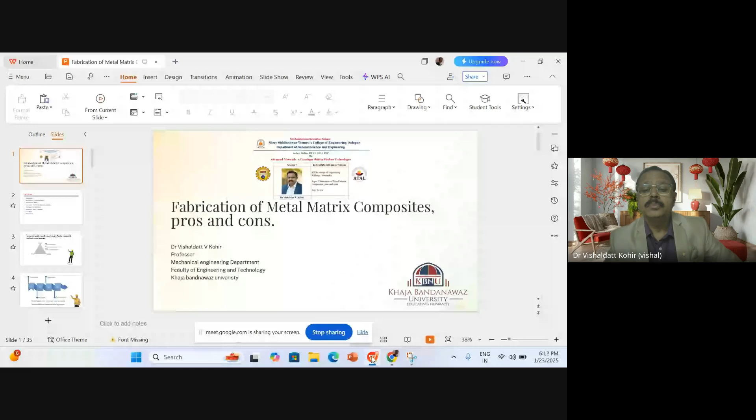So today's agenda: as usual, introduction to metal matrix composites, then the fabrication part, then comparison of various fabrication methods, challenges and limitations, then solutions to major challenges, then some case studies, and finally the pros and cons of fabrication of metal matrix composites.

As an engineer, we always look for three things. In my opinion, as a mechanical engineer, we look for speed, cost, and quality. Every engineer strives to do the same thing: he wants to produce the product as quickly as possible, as cheap as possible, and as good as possible.

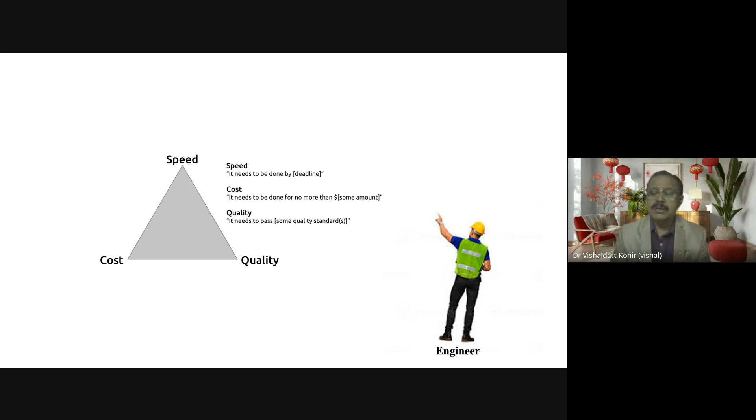In the changed scenario of the 21st century, an engineer's aim is to develop things for sustainability. Sustainable engineering is a way of designing and creating things that meet our needs without harming the environment or depleting natural resources. I hope everybody agrees with me on this.

Now the buzzword is sustainability. Whether it is the energy area, manufacturing area, or natural resources, everybody talks about sustainability. In this perspective, the pros and cons of fabrication of metal matrices become a little more special. So I congratulate the organizers for selecting this particular topic for the FDP.

As an engineer, always we look for these three things. Any engineer, especially a mechanical engineer, always strives to make a better product. And when we talk about a product, always we talk about its performance. What do you mean by performance? It should give sufficient service at a service station or place without failure.

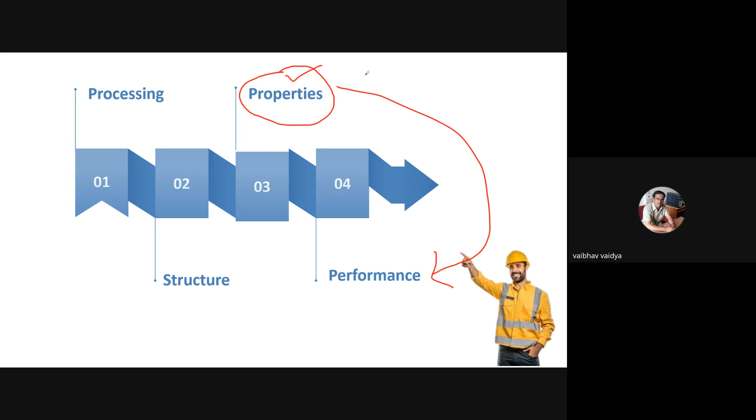Strength, tensile strength, compressive strength - these all put together I can call mechanical properties. Any other property? Thermal properties - fantastic, we can accept that. Any other? There could be physical, mechanical, chemical. Yes, you're absolutely right - physical property, chemical property, magnetic property, optical property. Okay, so there's a series of properties.

As a mechanical engineer, always we are interested in mechanical properties, but this property is dependent on its structure. The structure may be macro structure, microstructure, crystal structure, or electronic structure. But as a mechanical engineer, we are always interested in microstructure or crystal structure. So any change in the structure will lead to changes in the property.

A small example I can take, and I want one small answer from the participants. Graphite and diamond are made up of the same material. Can anyone name the material? Is it carbon, sir? Yeah, it's absolutely right, it is made up of carbon.

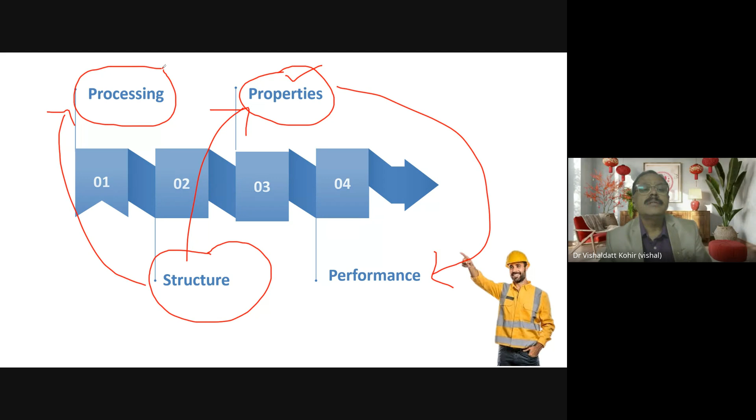So the structure-property relationship is very, very important for us. Performance depends on the properties, and property depends on the structure. And what kind of structure I get depends upon the processing. How I process it will decide my structure. So most of the time we are very much interested in the structure, especially the microstructure.

Okay, can anyone give me an idea what do you mean by a microstructure? Apart from it being visible through a microscope, apart from this definition, I want some explanation for the microstructure. So what do you mean by microstructure?

So participants, that's what I say, we are all teachers. We are all teaching the subjects regularly in our academic classes. So interaction is always very important. Sometimes I may learn something from you, you may learn something from me. So let's make it a little interactive, more discussion type rather than monotonous. The basic objective of the faculty development program is that we all faculty together make some changes in the teaching and learning process. That is the main aim.

Okay, so with this note, I am again reaching out to the participants. Can anyone tell me what do you mean by a microstructure?

I'm sharing the window. But when I share the window, I think again I'm getting full screen. Okay, let it be, okay, we will go with the chat box.

The answer which has been given, different phases, something is there, no? Organizer, phases present in alloys, this is yes, one answer. And one more is what? Arrangement of grains. Okay, these are very close ones. So basically, different phases, the distribution of different phases itself, we call it as microstructure.

So why I'm asking this question is that when we go for fabrication, this microstructure is going to decide the properties. Some connection is there between obtaining the structure and the properties. So that's why I thought of this. So it's better to have an idea before we get into the fabrication of structures. So in this way, there is a connection between performance and properties, properties and structure, and structure and processing.

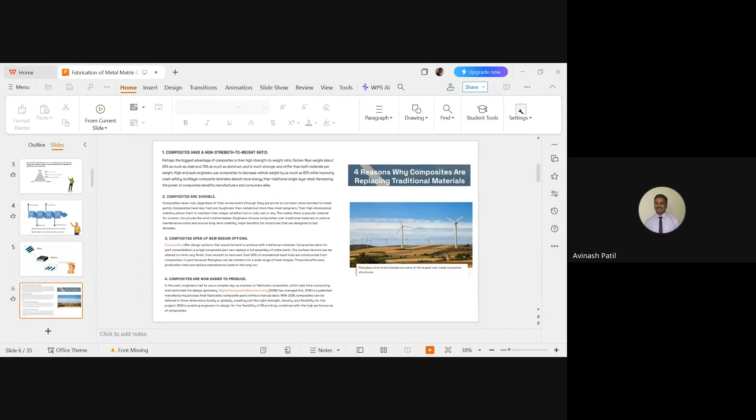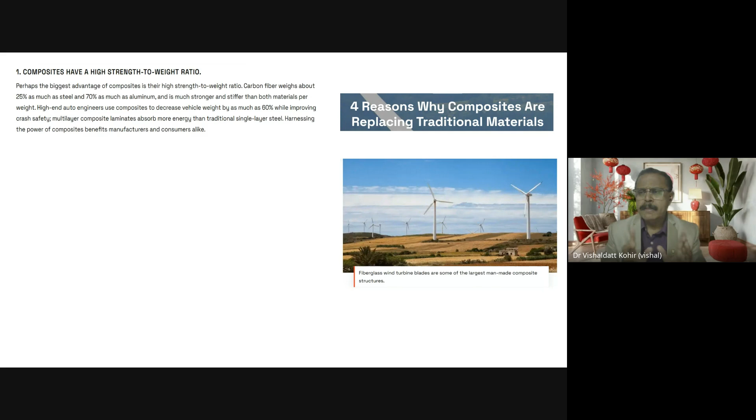Sir, may I interrupt? The slides are not changing. If you are changing slides, only the fourth slide is visible now. Is it visible or not? There are four reasons, processing, structure, properties, performance, still showing the same slide. Let me check. Now it has changed, it's the sixth one, but visible in small scale, not full PPT mode. I'll try the full sharing option. That will be better. Now it's visible, make it full screen. Now the entire screen is showing, four reasons, replacing traditional materials. I wanted to try another option but it may create noise. Let me log in again, there may be some echo. Is this okay now? Is it visible, full screen? Any echo? No, audio is clear, no echo, it is good.

So there are four reasons. Two I have discussed, and the third one I was explaining, that composites are open to new design options. So one, they have a high strength to weight ratio. Second, they are more durable. And the fourth one is composites are now easier to produce. This is one point to be noted nowadays.

Almost all areas of life, composites are being used. I would like to go back to the audience and ask for day-to-day objects or products made out of composite material, not necessarily metal matrix, let it be any composite material. Can I get examples of use of composites in day-to-day life? I'm going to the audience now.

Good evening, sir. Good evening.

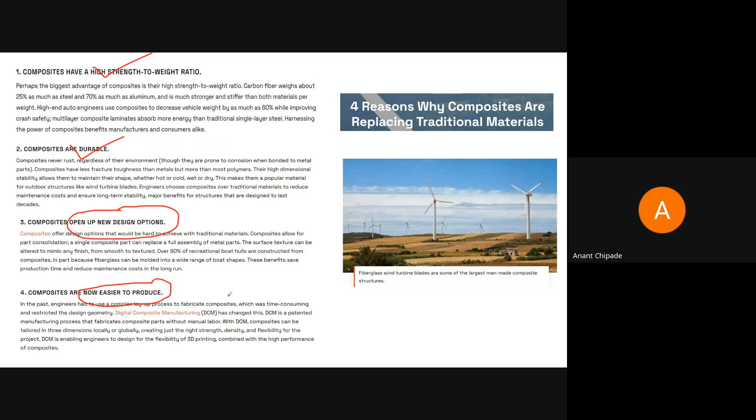Yes, sir. We use composite materials in day-to-day life, for example wristwatches, shoes, even mobiles, pens. You are right, you are absolutely right, there is no doubt about it.

Okay, Sachin, Bhosle, FRP ceiling sheet, sports equipment like badminton racket, bicycle frame. Yeah, fantastic. Any other?

So somebody says that beds. I'm not aware of the using of composites. Of course, with coir and spring, it may be a composite one.

So fantastic, thank you audience for being interactive. In my opinion, nearly 60% of the day-to-day life products we are using is all composites - it may be plastic glass, fiber glass, oven utensils which are suitable for microwave oven.

All these things - there is no area where these composites are not reached. This is my focus, I wanted to convey this message. Just look around you, everywhere you will find it - right from a hanger, pin, whatever product you take, it will be a composite material. Rarely we nowadays find any material which is made out of a conventional one.

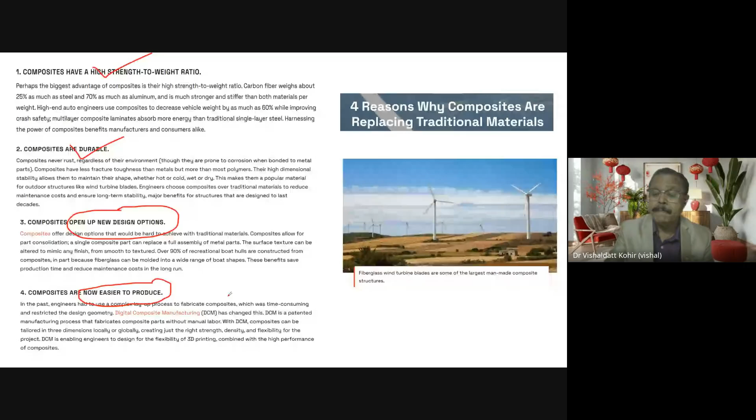This is my idea. So as we go a little further, we will focus more on metal matrix material, and most of them we will fill with 6000 series and 7000 series. This slide I will commit afterwards.

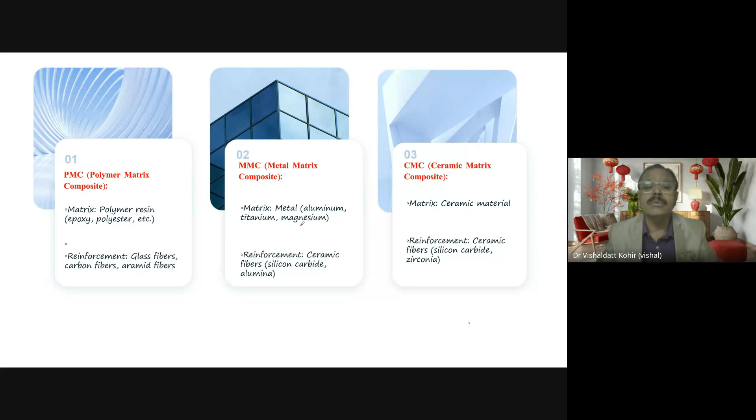My focus is on matrix. So always I will be looking at these metals: aluminium, titanium, and magnesium. When we go to the 6000 series, 6000 or 7000, we will find that along with aluminum, silicon and magnesium is added, and those are becoming more popular matrix materials.

But basically, we use aluminum or aluminum alloys as the matrix material. In reinforcement material, silicon carbide is there, alumina is there, boron carbide is there. Even people are going with hybrid composites.

I hope that every participant will be having some idea about these things. Just it's a refreshing thing.

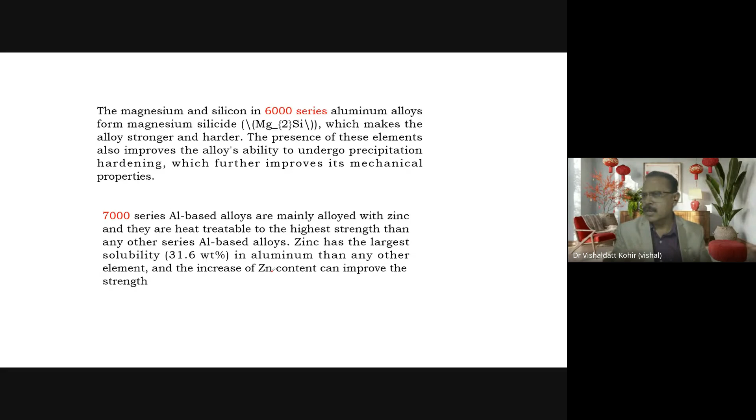6000 series is basically a magnesium silicide series, and 7000 series basically has zinc. Most of the participants might have got their PhDs on these series, or some may be still pursuing it, some may be working on it. But nowadays popular series are the 6000 series and the 7000 series.

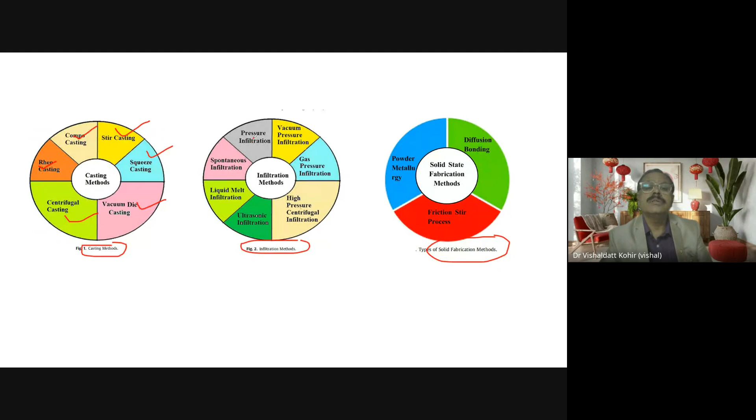So when it comes to infiltration, there is pressure infiltration, vacuum, gas, high pressure, ultrasonic infiltration, liquid - some are very popular, some are yet to be popularized. But again, in solid fabrication, powder metallurgy is the most popular one, and diffusion bonding is also there.

Nowadays, people are using even what we call the friction welding technique. Friction stir technique is also being used to make a matrix material. So basically, when we talk about a matrix material, most of the time...

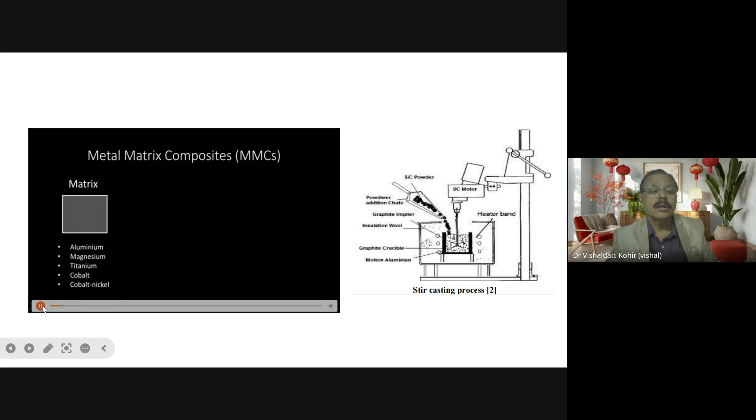The most popular method is what we call the stir casting method. Stir casting is nothing but adding our reinforcement material into the molten state matrix material. There are a variety of ways to do it.

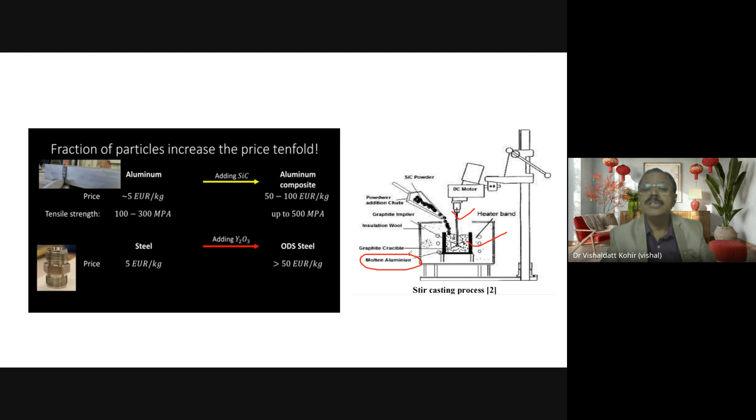A small sketch is there that most people may be aware of. There is a stirring mechanism, and this is a crucible, you can call it an oven, where we make the molten metal, most of the time aluminum. In this molten aluminum, I'm going to add my reinforcement material, which may be anything. In this way, we can make a composite material.

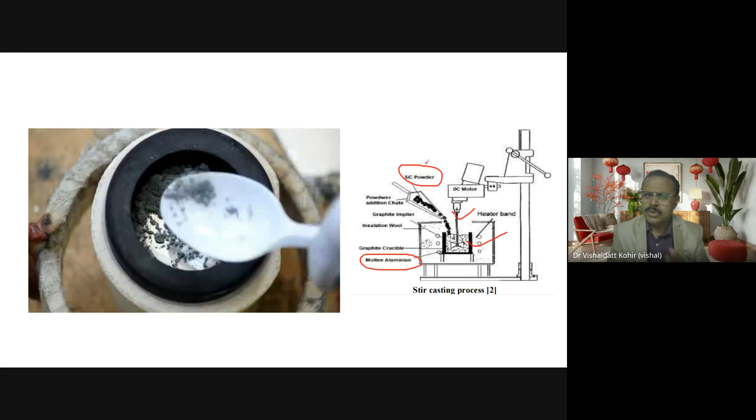I talked about the microstructure. When we have a better microstructure, we have better properties, hence my performance will be better. For that purpose, the distribution of phases or reinforcement material inside the matrix material becomes very important. How things are distributed, how grains are formed, that decides the structure, which decides the properties, which decides my performance.

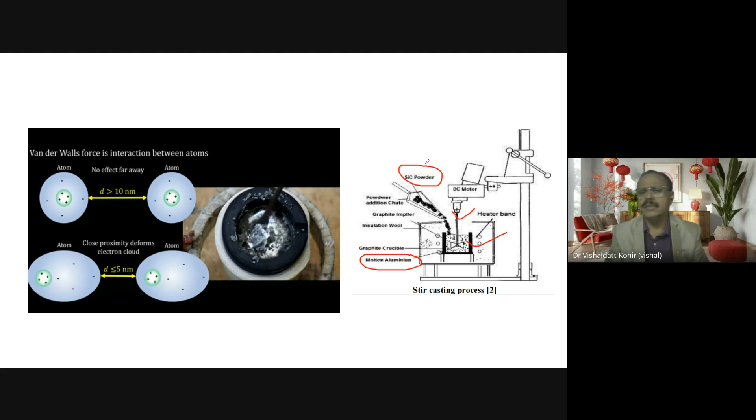So what issues or challenges we face in stir casting, we will see in coming slides. What challenges are there, how we are going to overcome them, we'll discuss a little later. I think I was able to give you an idea of how a metal matrix is prepared using the stir casting process.

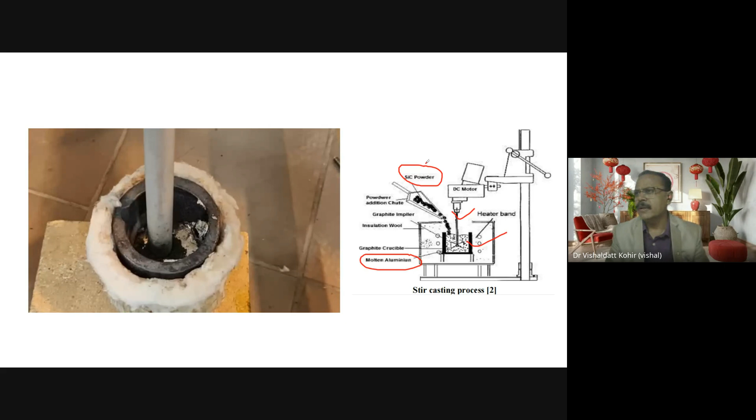One side I'm showing you the video just for enhancement of understanding, another side I'm showing you the sketch. There are different kinds of setups. Normally in an experimental setup, there will be a crucible, and below that we will have a die attached, so that we can easily tap out the aluminum composite material and pour it into the die, and get the ingot of composite material.

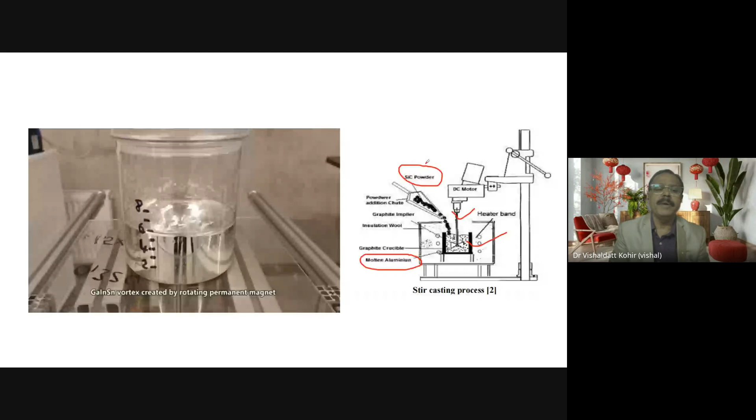This is how the metal matrix material is prepared with the help of stir casting. I hope I succeeded in conveying the message on stir casting.

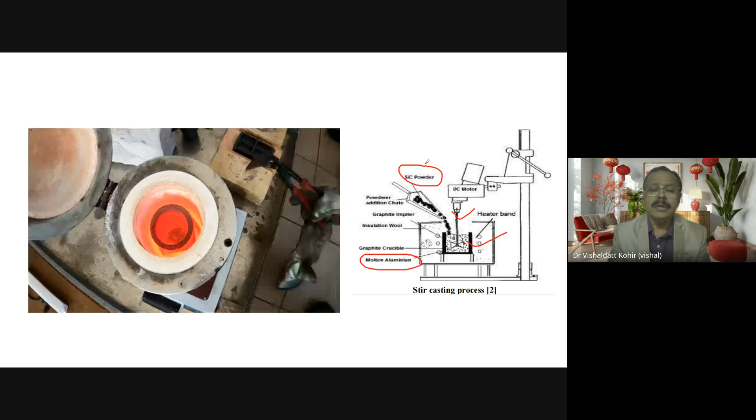Am I right, participants? You got a good idea? Yes, Sachin Bhosle says yes. This is the only way by which, unless we have an interaction, it's difficult for me to get an impression that people are watching it or taking advantage of the FDP.

Okay, so anyhow, we move it further, we go to the next slide. This is what we call the squeeze casting method. So in squeeze casting, what happens? It is also a variety of casting process.

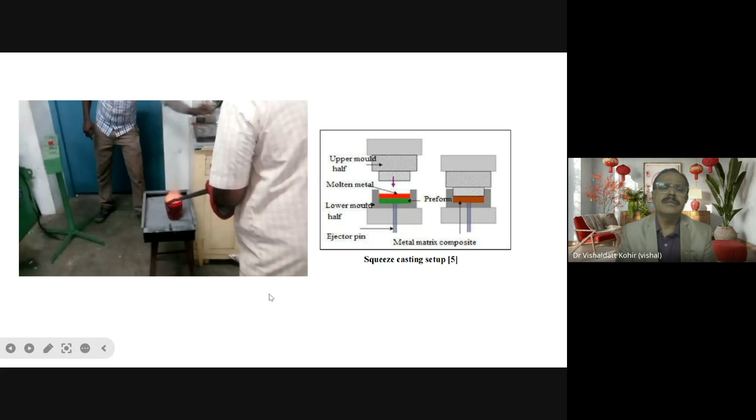Again, molten metal is there, and pouring of the reinforcement material is there. There are different varieties in squeeze casting. In some squeeze casting processes, we use preforms. This is what has been shown here, a preform of reinforcement material. Later we put the molten metal, and again we press it. In simple terms, squeeze casting is nothing but solidification under pressure.

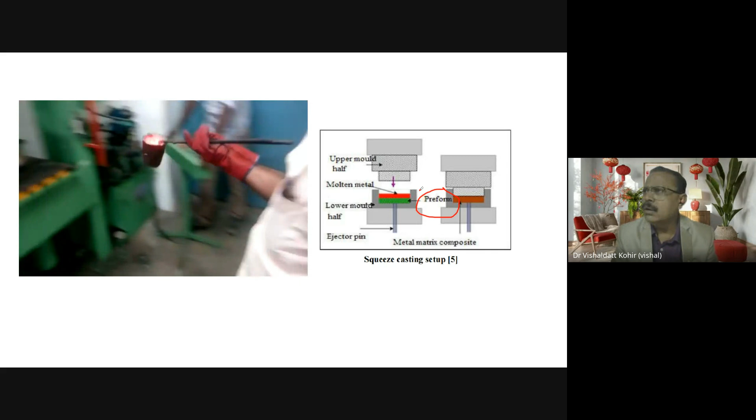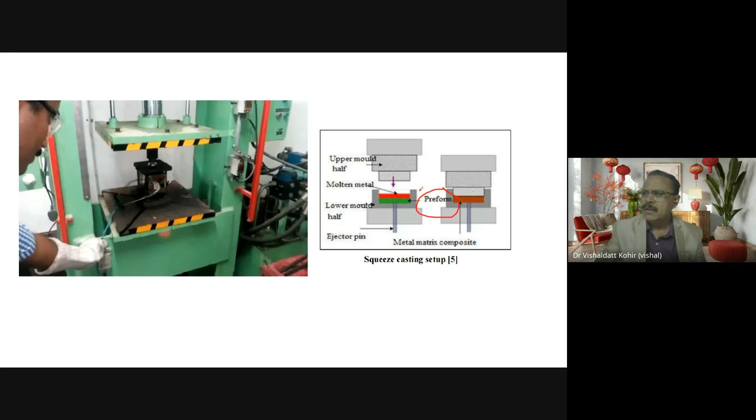There is a lot of difference in properties when we compare it to stir casting. I'm very happy to share that a very successful research work was carried out by Santosh Madki using this squeeze casting process. If possible, we will have a small interaction with Santosh Madki to understand the challenges he faced during the squeeze casting process and how he overcame them. So probably at the end of my presentation, we go for it.

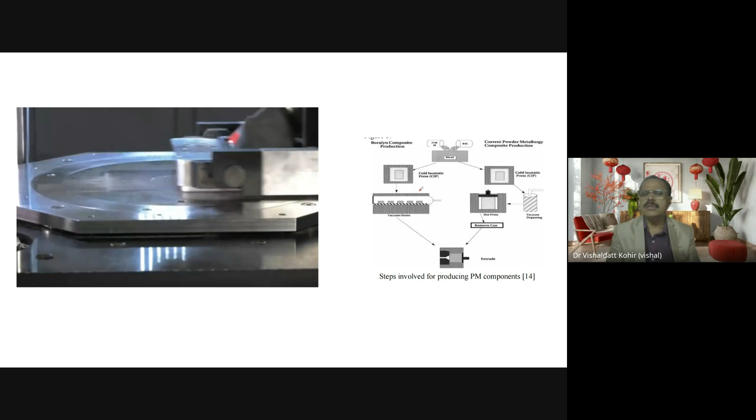When it comes to stir casting or squeeze casting, when we carry the material in crucibles or melt it in the furnace, leakages or wastage are there. But as far as powder metallurgy is concerned, very minimal wastage of materials is there.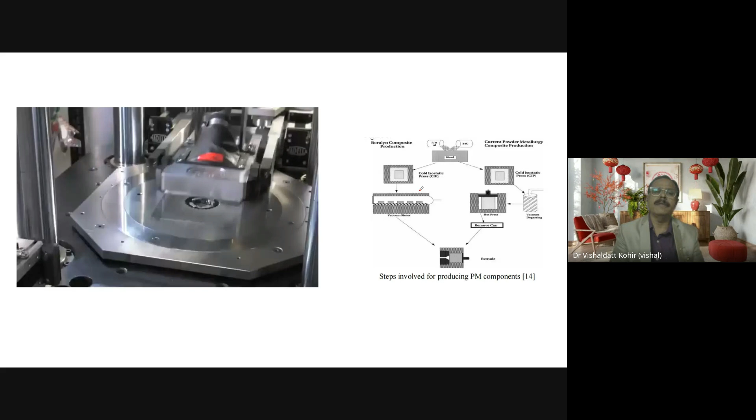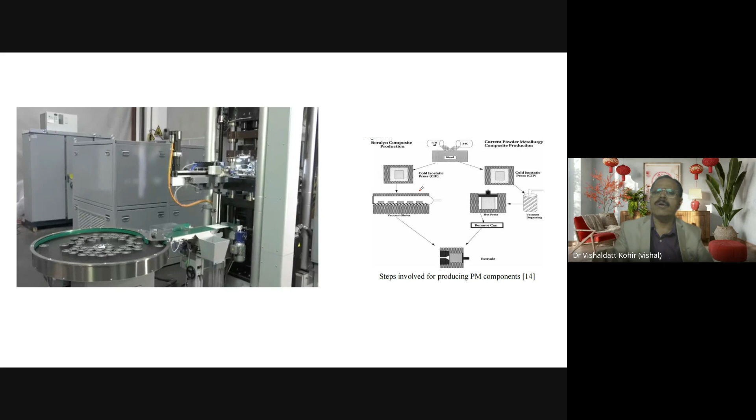The biggest advantage with powder metallurgy is the very proper distribution of reinforcement material in the matrix material. Most of the metal matrix material will be particulate type. Rarely we deal with fiber type or discontinued type, but basically we deal with particulate type composite material, because the metal matrix and the reinforced metal, whether metal or non-metal, are all in powder form, meaning small grain form.

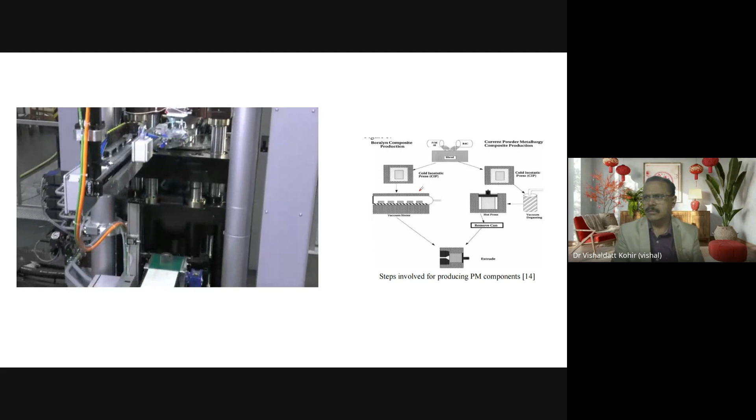So definitely good blending will be there, good compaction will be there. Apart from good compaction, the binding between the reinforcement material and the matrix material is better in powder metallurgy compared to stir casting or squeeze casting. This is because of a phenomenon we call sintering.

Sintering is normally done at 60 to 70% of the metal's melting temperature. This sintering process will ensure proper binding between the reinforcement material and the matrix material. Normally we call this the interface - the binding between the matrix and the reinforcement material is called the interface, and it plays a very important role.

There are other methods too. Diffusion method is there - with the help of diffusion method we can also make matrix materials. Everybody is familiar with the carburization method - compact carburization, solid carburization process - it comes under heat treatment. The main principle behind diffusion is movement of material from higher concentration to lower concentration, using Fick's laws. It's a slow process, but the advantage is that it happens at an interatomic level - that is the biggest advantage with diffusion.

Another popular method is what we call the spray forming process. This is also a very easy method. Normally we have a net of fibers or reinforced material, and over that we keep on spraying our matrix material. This is another way of making the metal matrix.

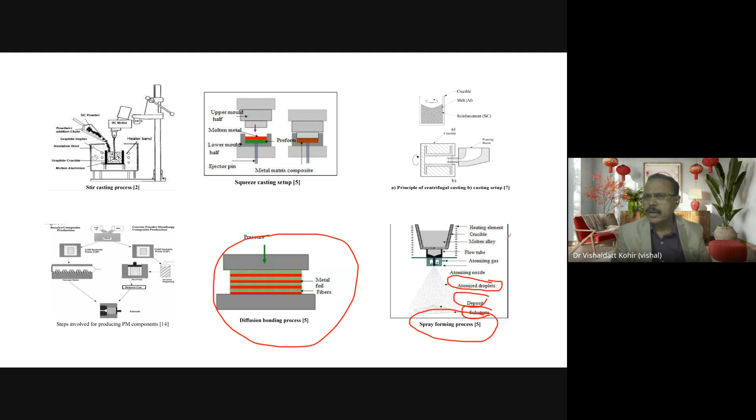The diagram shown here shows atomized droplets, and this is the substrate on which we keep depositing it. In this way, we try to have a distribution of particulate type reinforcement material in the matrix composite. Remember, most of the time when I talk about metal matrix, I will be dealing with aluminum with a reinforcement of silicon carbide, aluminum oxide, boron carbide, or silicon carbide.

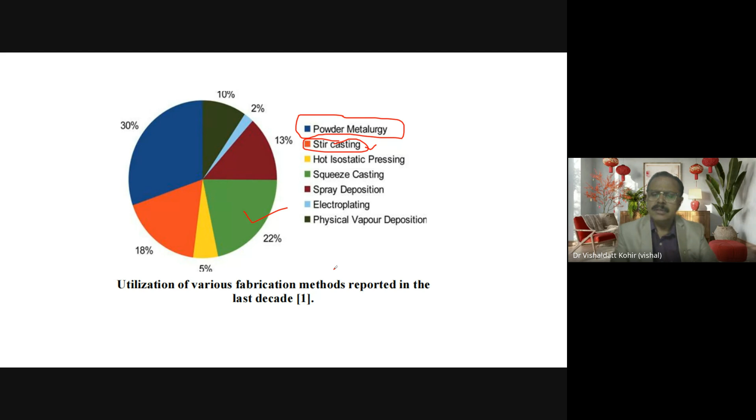Apart from conventional and popular methods, there are other methods too, such as physical vapor deposition, chemical vapor deposition, electroplating, spray deposition, as I just discussed. So this gives an idea of how various fabrication processes are being used in the present scenario.

This is a comparison I wanted to make between stir casting, squeeze casting, compo casting, in-situ, and spray casting, based on cost effectiveness, application, and comments. So: least expensive, medium, low, expensive, and medium respectively. Suitable for mass production, aluminum-based composites; squeeze casting is used for automobile components such as cylinders and pistons, suitable for all kinds of reinforcements.

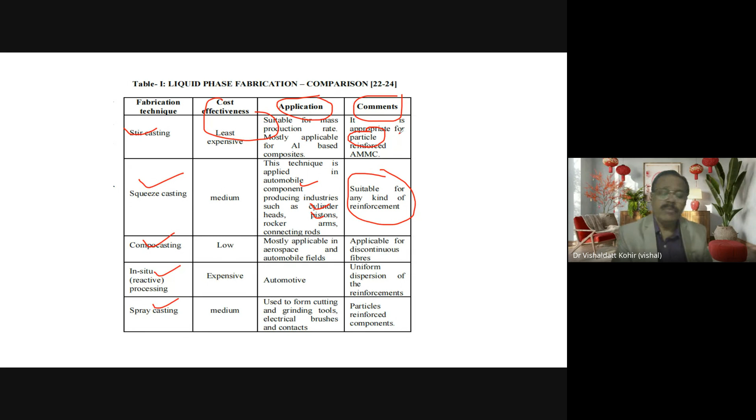Stir casting is most appropriate for the particulate type. It is not that suitable for the fiber or the disc. So these are the few comparisons which we have when we deal with making metal matrix materials.

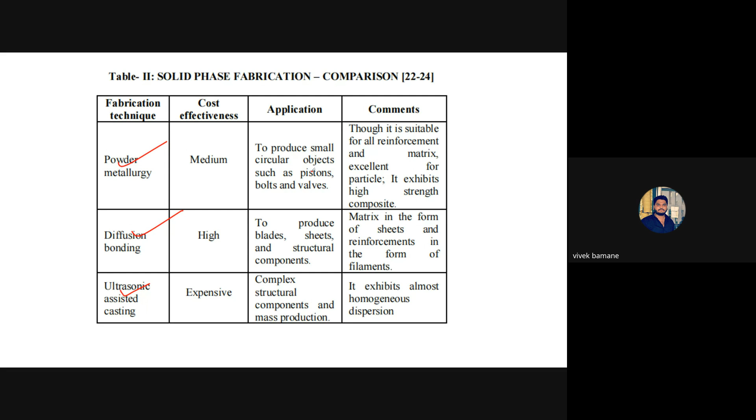A similar comparison we can have in solid state processing. Powder metallurgy is there, diffusion bonding is there, ultrasonic assisted casting is there. So I think you get a better idea, because basically we made only two criteria: one is the cost and one is the application.

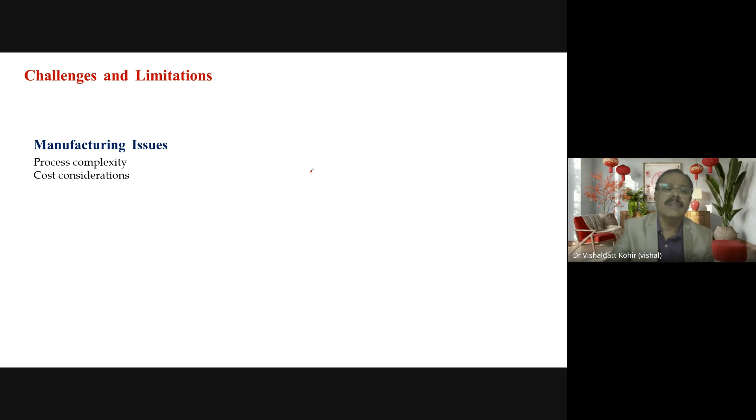Now we try to understand the challenges and limitations of fabrication. Again, we subclassified them into different categories: manufacturing, material, practical, and so on. In manufacturing issues, we talk about process complexities and cost consideration. Apart from that there are others, but I have taken only two.

We talk about process complexity. Temperature control is one of the major issues we deal with. For example, in a metal matrix composite between aluminum and silicon carbide, maintaining the melt temperature is critical.

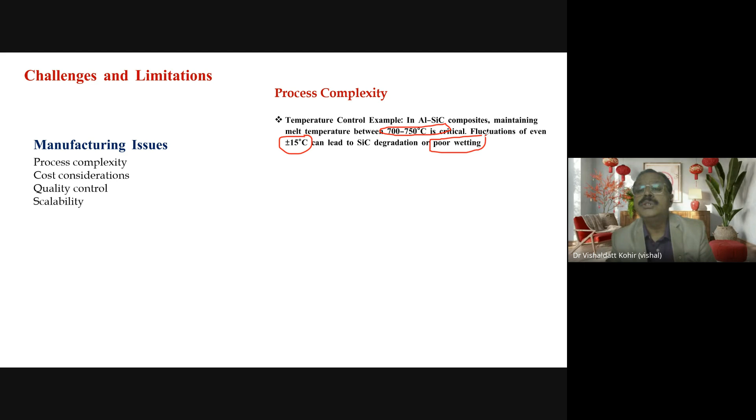This is one of the challenges. We should maintain that temperature, and only at that time carry out the addition of the reinforcement material. A fluctuation of about 15 degrees centigrade can lead to degradation or poor wetting. Wetting is one of the major issues when we deal with stir casting. So this is one aspect of process complexity.

The second one is distribution control. This depends on the stir speed. We normally use mechanical stirring which is rotating, and the speed of that has also become one of the crucial points for our stir casting process.

Tooling has also become one of the areas or challenges we deal with when working with matrix materials. Cost consideration is also one more issue.

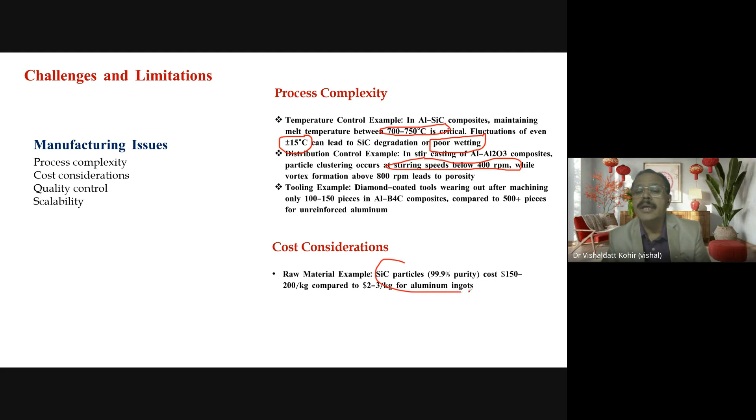If you compare in terms of dollars, getting silicon carbide at 99.9% purity is a costlier affair compared to conventional materials. Equipment costs also increase when we go for powder metallurgy, vacuum methods, or other things. So these are some challenges we face when manufacturing composite materials, in particular metal matrix materials.

Testing is also a costlier aspect. Normally researchers carry out mechanical property tests and other things. But if you want more detail about the distribution, how the composite material is affecting properties, we need more sophisticated inspection methods, which will be costlier.

So, solutions to the major challenges. For manufacturing solutions, we have process control solutions: we should make use of advanced temperature controllers. Implementation of a closed loop temperature control system is very important because we need two or three thermocouples to measure the temperature, one of which measures the molten temperature of the matrix material.

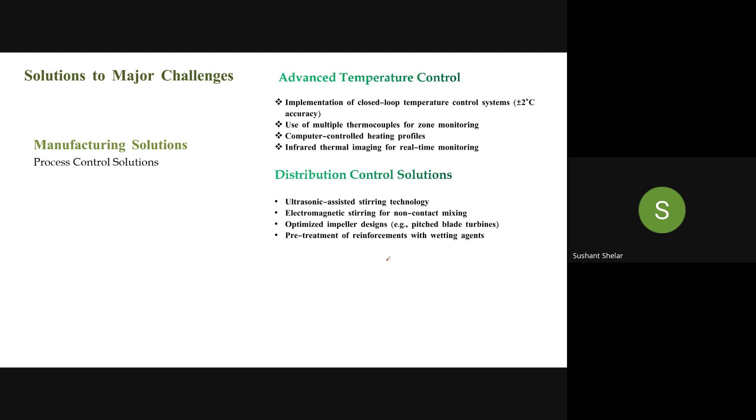Sir, it's a stirring device like a metallic plate. Are you talking about that? Not exactly a metallic plate. There will be an impeller type of design there.

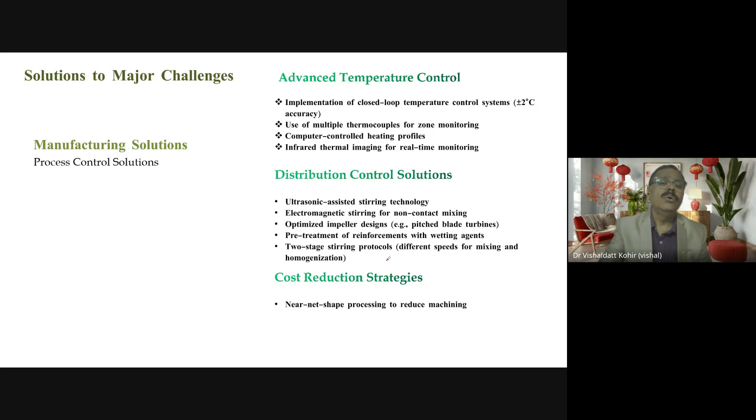Similarly, a change in stirring design will create so many benefits, including cost reduction. So these are a few other solutions we suggest in order to reduce the cost. We have seen the manufacturing issues and tried to find solutions.

On the same lines, now I will deal with challenges and limitations, starting with material challenges. What are the material challenges? Interface reactions, reinforcement distribution, thermal mismatch, property consistency. But I'm going to deal with only two of these.

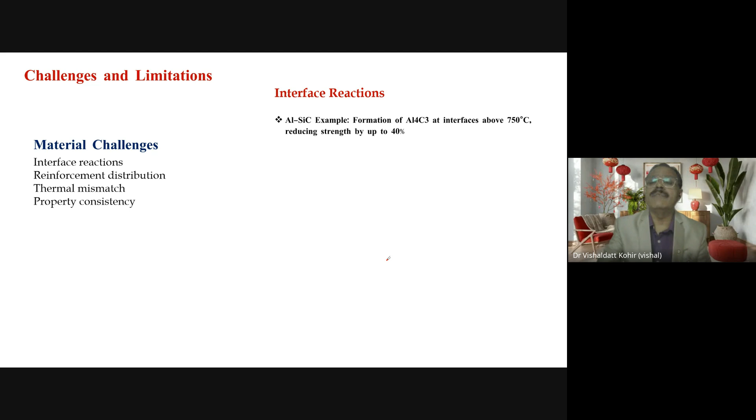Interface reactions. Again, we talked about controlling the temperature, which has a major impact on the interface. If we talk about titanium with carbon, a brittle titanium carbide layer forms during processing above 800 degrees, leading to premature failure.

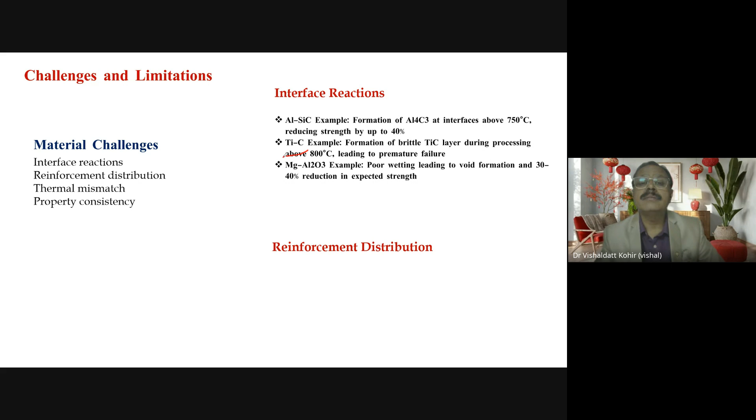These are a few challenges we face when we deal with the formation of metal matrix composites. This is one example. These are all issues related to the interface, because matrix, reinforcement and interface together form a composite material.

So these are what we call reinforcement distribution issues. One of the issues is clustering of particles. We want an equal distribution, but the challenge is that particles tend to cluster.

This becomes more troublesome when we deal with nanoparticles, where clustering is a major issue in preparing metal matrix material using stir casting processes. Another example: aluminum and boron carbide particles settle within 5 minutes without continuous stirring. This is one of the challenges we face with reinforcement distribution.

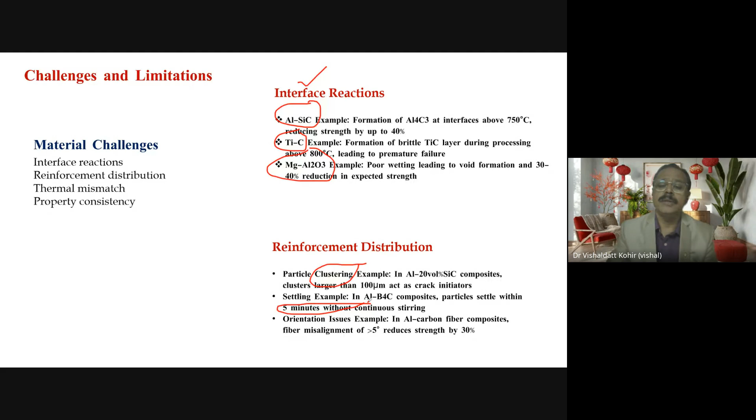Orientation issues are another challenge we face when making metal matrices. So we go for solutions. These are a few solutions which researchers have tried to give.

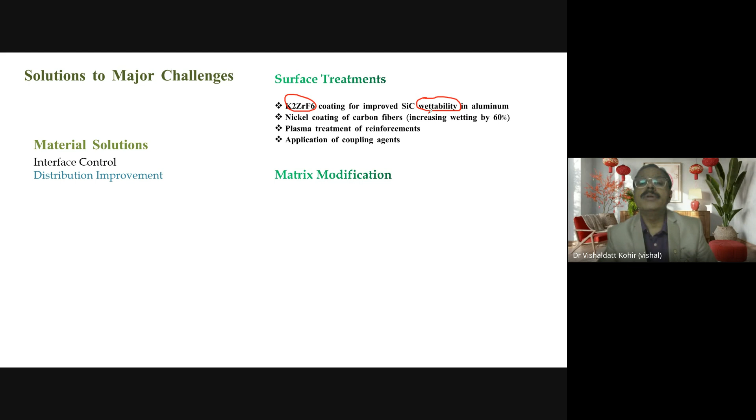You put a coating, I'm not remembering exactly which material it is, but it will improve the wettability.

As far as wettability is concerned, I wanted to give a small example. Normally everybody shaves, right? For shaving, we apply foam, we apply paste, we apply gel.

Am I audible, dear participants? Yes, sir. You are perfectly audible, sir.

Similarly, for applying to hair, we use hair oils, we use gel. What is the big advantage when we apply oil with gel? Probably the most popular gel is Set Wet gel, I think it's very popular. So what is the advantage of gel?

Myself, I experienced that gel. Earlier I used to use the shaving tube - paste would come, apply paste, use the brush to create a foam on the face, then shave. Later when gel came, we started using gel, now foam also comes. What is the big advantage of gel?

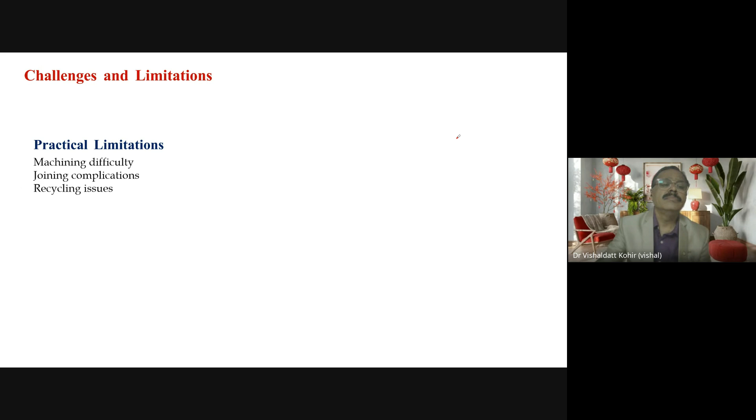Let me check one minute. Okay. Check one second, you got it?

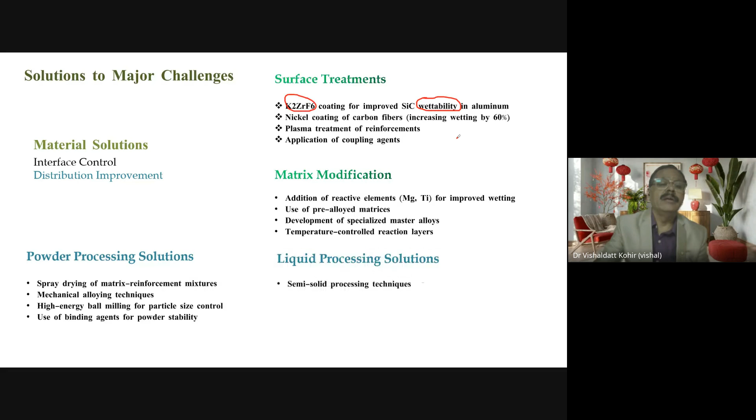Yes, so I covered the challenges in material challenges, then I provided you the material solutions. The third part, I'm going to deal with the challenges with practical limitations.

So these are the few practical limitations which are listed here - machining difficulty, machining tool wear is an example. So this is one of the difficulties we get. Why am I talking about this machinability and everything?

After making the matrix, synthesis of metal matrix doesn't stop there - finally my metal matrix has to perform. If it has to perform, definitely it has to undergo machining, either at the primary stage manufacturing process, or secondary one, or to achieve dimensional accuracies - you need to go through machining. That's why machining difficulties become a major issue in metal matrix.

So tool wear is a problem. Because in metal matrix, when we add the reinforced material, we are improving the mechanical properties, basically improving its hardness, in order to get better wear resistance. When it becomes hard, naturally a question arises of tool wear - we should have a tool which can withstand that hardness with less wear. So tool wear is a difficulty, and surface finish is another one.

Unless and until we achieve the required surface finish, the said functionality cannot be achieved. When said functionality cannot be achieved, then performance will be less.

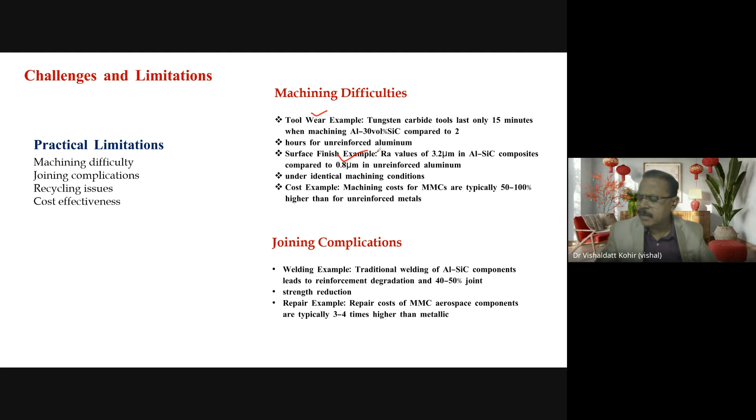Interestingly, in some cases we need a rough surface, in some cases we need a very smooth surface. For brakes and other things, we wanted more friction so that the braking system can work efficiently, so we wanted a not-so-smooth surface finish. When it comes to any rotating or moving part, we wanted a better surface finish. So this is how surface finish will have an impact, sometimes good and sometimes not so good.

Joining complications are also there, because joining is another secondary manufacturing process which helps in converting the metal matrix into products. So that's what I listed here as challenges.

Let's try to look at what we call the solutions for that, practical solutions.

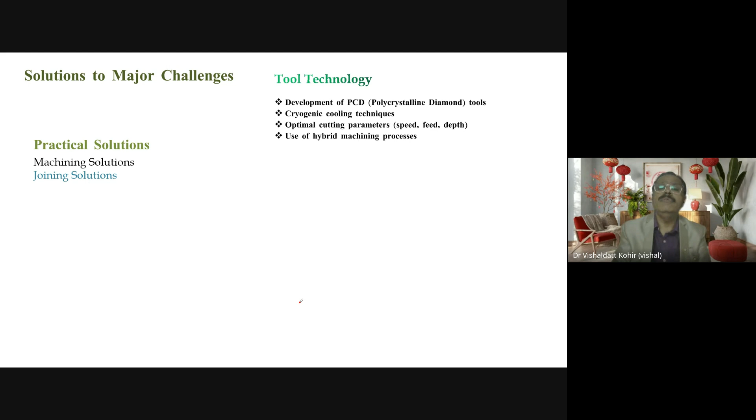Tool technology is there. PCD, polycrystalline diamond tools, we can make use of. Cryogenic cooling techniques we can make use of. Optimal cutting parameters we can change - most researchers are trying to find out optimal cutting parameters. Use of hybrid machining processes, process optimization, we can talk about it.

Implementation of adaptive control systems, minimum quantity lubrication (MQL) we can make use of. Ultrasonic assisted machining we can go for. Laser assisted machining for hard materials we can go for. We can even go for advanced welding techniques, alternative joining methods we can think of.

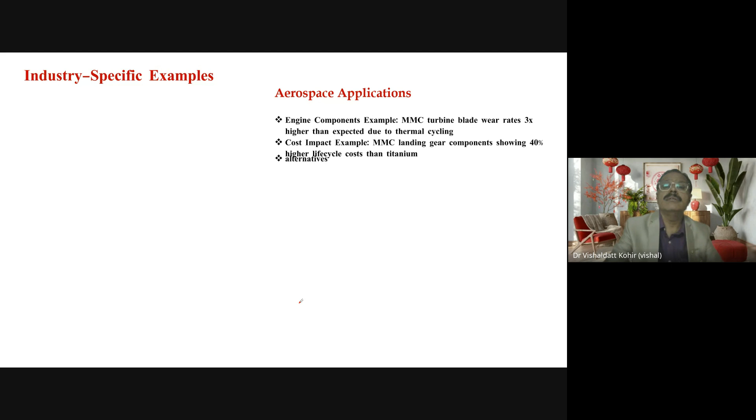These are some solutions for the practical problems we face in dealing with metal matrices. Some industry specific examples we'll take now. These are the few applications where we make use of metal matrices - I'm not going to go much more into it because most people are aware of where our metal matrices are used. So, successful implementation, I wanted to talk about it.

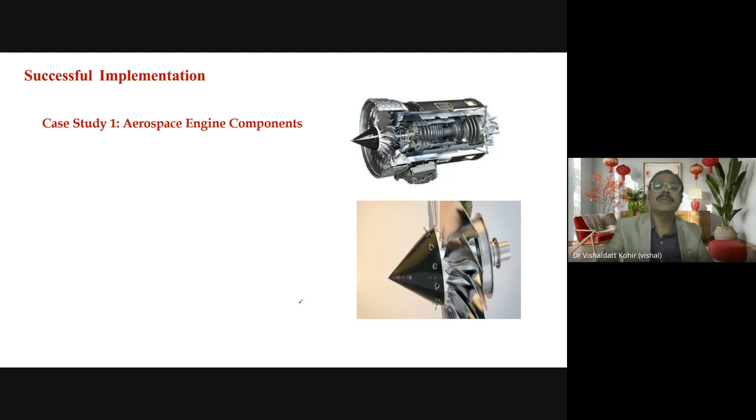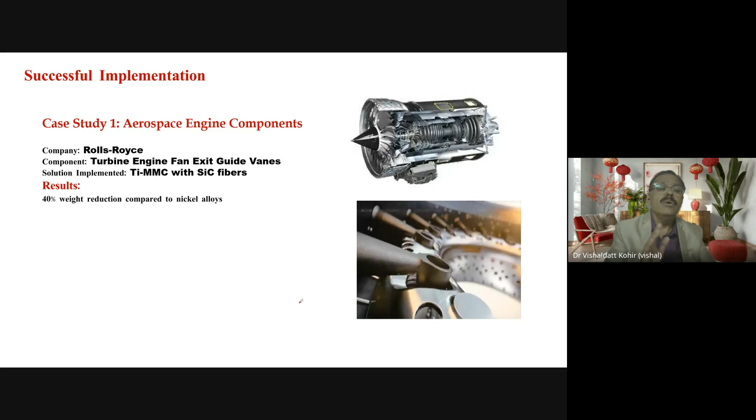This is a case study of aerospace engine components. The company is Rolls-Royce. The component is turbine engine fan exit guide vanes. The solution implemented is titanium metal matrix with silicon carbide fibers. The results we got: 40% weight reduction compared to the nickel alloys which were earlier used, and service temperature increased tolerance to 600 degrees centigrade.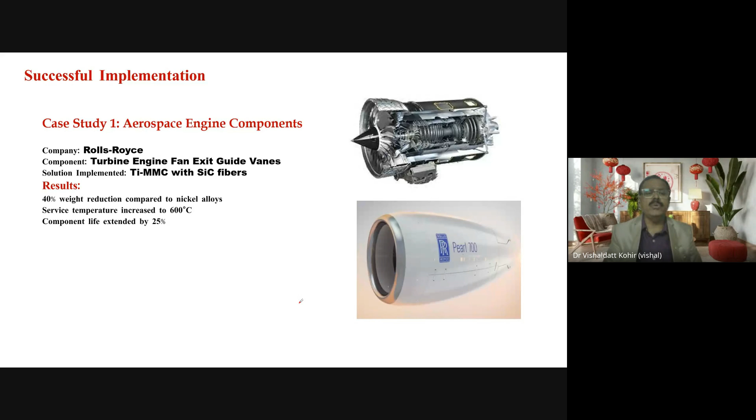Most of the time we deal with these in gas turbines used in airplanes and other things. Component life extended by 25% - what a wonderful achievement. Because when we deal with turbine blades or gas turbine blades, it's a big issue, so very wonderful results we got. 30% cost has been reduced. These are the few results.

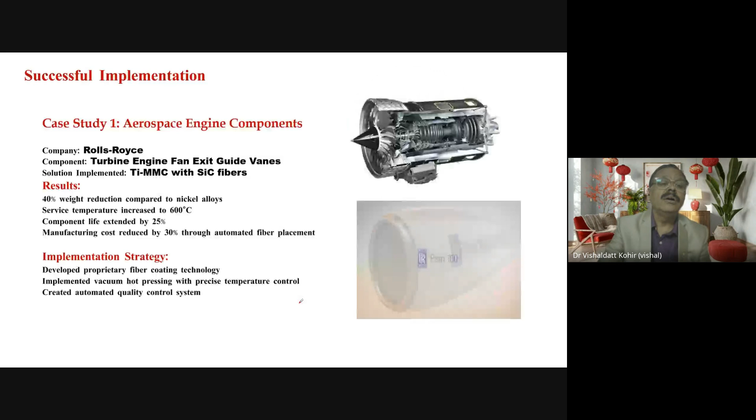What strategy did they develop or use? They developed a proprietary fiber coating technology, implemented vacuum hot pressing with precise temperature control, and created an automated quality control system. So this is the case study showing implementation of challenges and solutions in order to achieve better performance of the materials.

Let me go with one more example, case study 2, that is the automotive brake system.

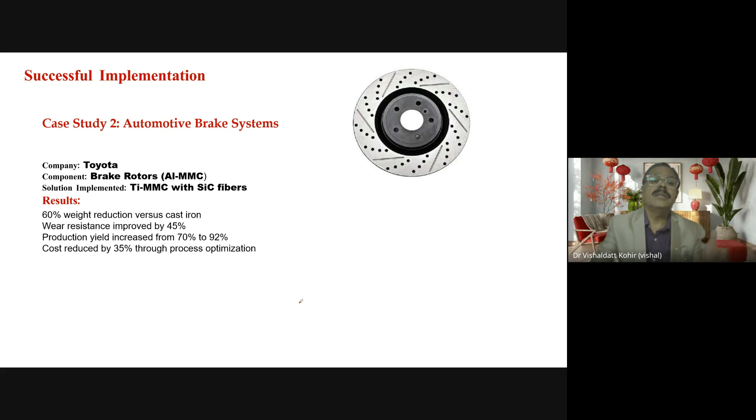Cost reduction of 35% through process optimization. Key innovations we got: a K2TiF6 coating on silicon carbide particles, which I gave as a solution - this is an invention from Toyota company. Two-stage stirring process, and inline ultrasonic testing.

I'm just showing how these are made: hard particles like silicon carbide, aluminum oxide, boron carbide are added to the aluminum matrix. This is a known thing. So these are the benefits.

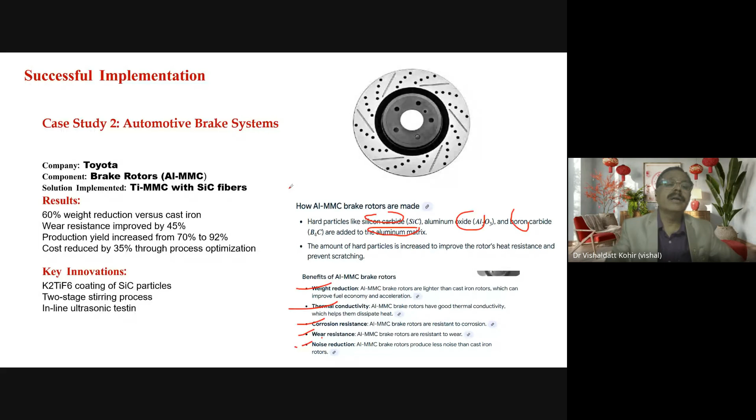Just to add to it, this is a case study - a third one on industrial manufacturing. Sandvik Coromant is the company. Component is cutting tools. Solution implemented is functionally graded tungsten carbide cobalt metal matrix. Almost everybody knows that nowadays all carbide tools are made out of composite. Tool life increased by 200%.

Cutting speed improved by 40%. Manufacturing cost reduced by 25%. Defect ratio is below... Implementation involves gradient composition control and advanced sintering technology. This sintering technology is very important.

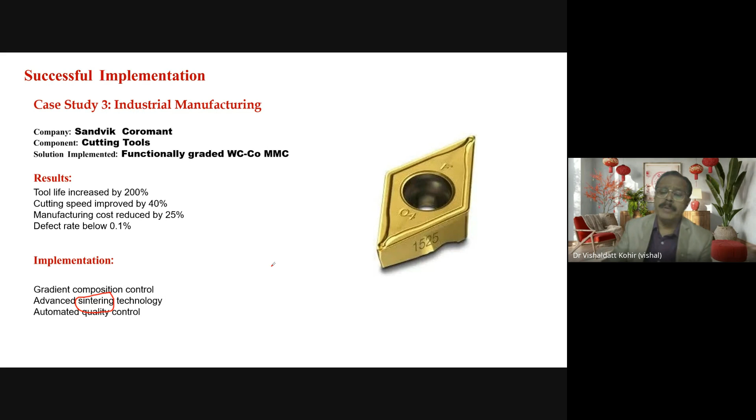This sintering gives a perfect binding between the cobalt and this tungsten carbide. So these are some successful implementations, challenges, and solutions in our metal matrix processes.

This is my last slide. My topic was pros and cons of fabrication of metal matrix composites. Let me sum up in 4 to 5 points. First, enhanced mechanical properties - this is a known thing for us, that's why we go for composite material. Less weight, better properties, less cost, more durable - these are always the dream of a mechanical engineer, and hence we can achieve it.

The second thing is tailored properties - another big advantage.

Proceed, sir - yes, high temperature performance is there, good dimensional stability is there. These are the few pros, and these are some cons: high production cost, limited ductility, challenges in achieving uniform distribution, wettability issues, and processing complexity.

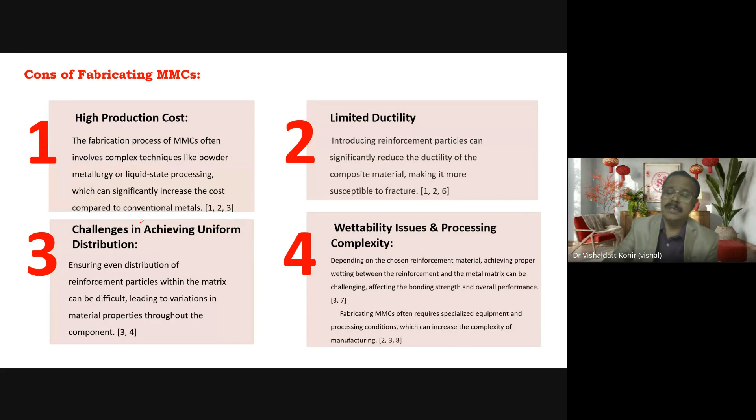So these are my references. Thank you. I'm giving out some time, some 5 minutes I think is still left. We can go for interaction.

Participants, can someone ask a question? Santosh Madki is there in this session - he was there for some time, sir. Currently no, he's not. Harish Gudkar, have you joined? Shall I call him? No, I think my voice will be reaching him. Yeah, it is reaching. Shall I call Santosh? Not necessary, not necessary. I just wanted one more thing.

One of the challenges faced by Santosh Madki was with the application of pressure in achieving squeeze casting. He carried out the process with less pressure. We were skeptical whether with that pressure we would get a better microstructure or better distribution of the reinforcement material. To our surprise, it was a good one, and we got very good feedback from the person where Santosh Madki carried out his machining. If Santosh Madki were here, he would have elaborated more on these things. So I think with this I conclude my session.

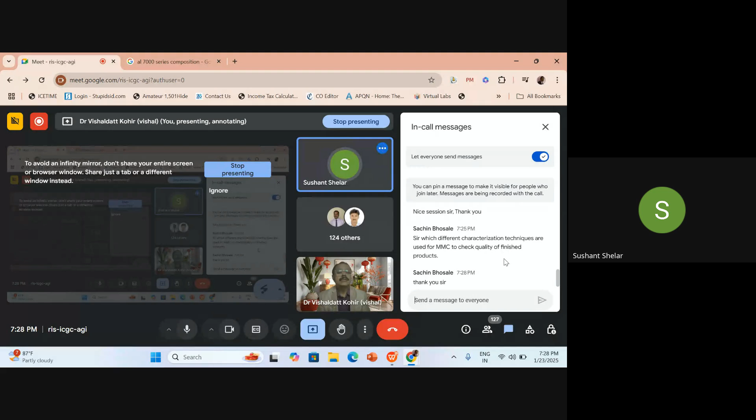Ritesh Mulge, sir, did you want to ask a question? You have raised your hand. No, it was about the previous one, sir. Okay, fine. Thank you, sir.

Yes participants, anyone who wants to ask a question can directly unmute the mic and ask. So how many persons are doing research among the participants? I could see 127. How many are pursuing?

Dear participants, kindly interact. Basically this is a faculty development program for us. Development can only take place with interaction - when we interact, many misconceptions will go away, because we are all teachers. Somebody said they are working on nano composites - very good.

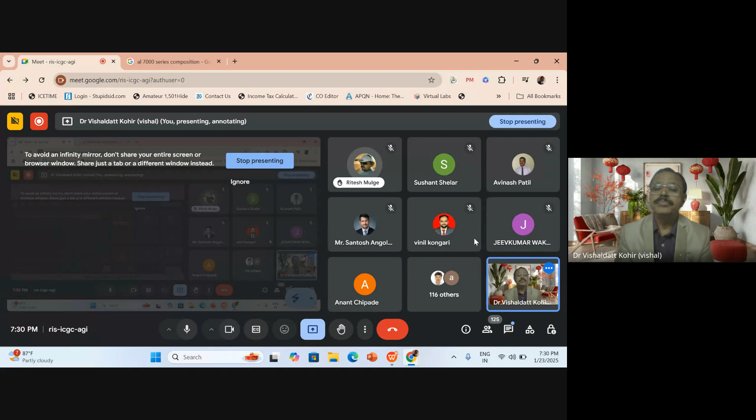So, is anyone going to ask any question more? Can I know, Uma Maheshwari, have you made any composites? Is your research work at the initial stage or the advanced stage? Madam, you can unmute and speak. I wanted her to share her own experience, because everybody will be doing their research and everybody will get different kinds of challenges. So an interaction or sharing of challenges with other faculty members will be advantageous.

Remember, all my dear faculties and researchers, be vocal about the things on which you are working. Normally we don't want to open up thinking 'my secrets will be exposed,' but that's not the case. Everybody will be in the same situation. Anant Chipade is willing to work on ceramic composites. Very good.

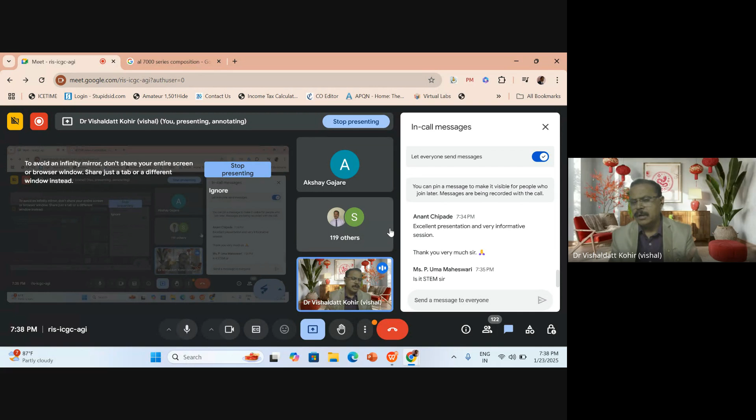I got your question. So you are trying to say that you wanted to do experimentation with composite material as a material for the crankshaft. So see, when we call it research, it is always in two directions. One, it can be done, or it cannot be done. Both results are very much helpful for us.

So I recommend you to do a little survey. Has anybody previously tried to make use of this composite material? Take out a survey on that. If somebody has done it, look at their challenges, try to remove those challenges and try it in a new way. This is my suggestion. If you don't find anybody who has done it in your survey, I recommend you to go fully ahead with this. At least you can say that composite material never works for the crank. That conclusion you can come to.

Okay sir, thank you so much. You got my point. So you may be the pioneer in that. Definitely when we talk about composites, vibrations will be reduced, there is no doubt about it. Thank you so much sir.

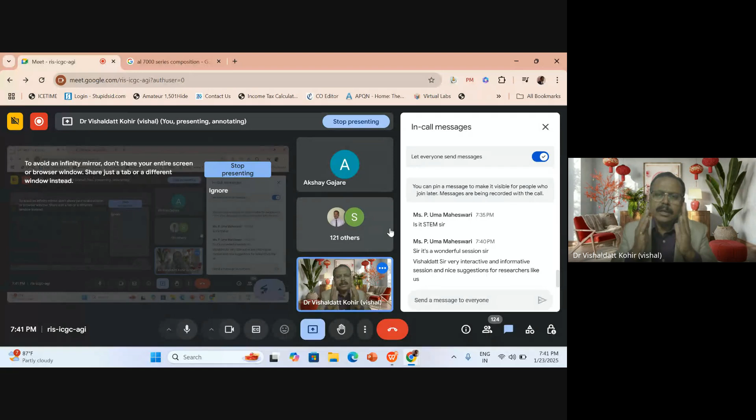So never stop your imagination, your innovation in conducting research. Okay sir, now it's so clear, thank you so much Akshay sir. Thank you so much. With a big heart, you go with the research. Yes sir.